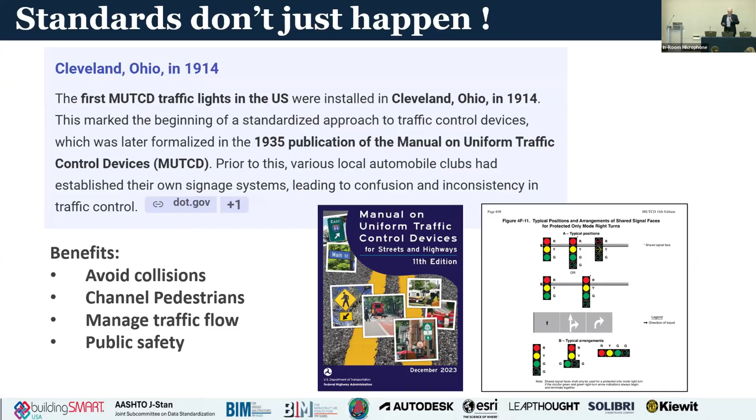Some of those advantages of standards are predictability of behavior, consistency, the ability to collaborate. We can share information that is meaningful both to the sender and the receiver. There's some reliability about the integrity of the data. So standards are often born of necessity, per the example we've just seen.

But as an industry, we're on a journey to really transform to digital project delivery, digital as-builts, asset management lifecycle systems that require data to be shared through the project lifecycle. So as we're on a journey for digital transformation, we've got to make the new standards that allow us to be efficient. We were all fine with 2D drafting standards. We were all happily drawing pen on paper, publishing sets of documents, being able to review them, redline them, wet signature. We had a set of standards for 2D drafting.

Then along came CAD, and we had to rethink and revisit what that new technology requires that we're not doing today, because our documents are now electronic files. They're PDFs. They're being shared digitally. They're being viewed on computer screens. All of that required CAD standards that didn't exist in the world of 2D drafting.

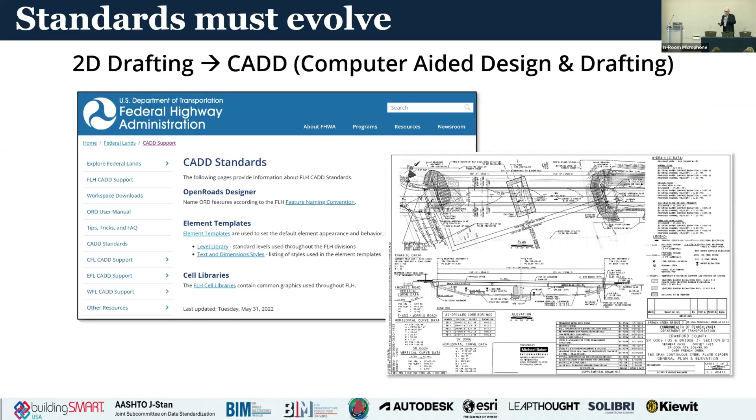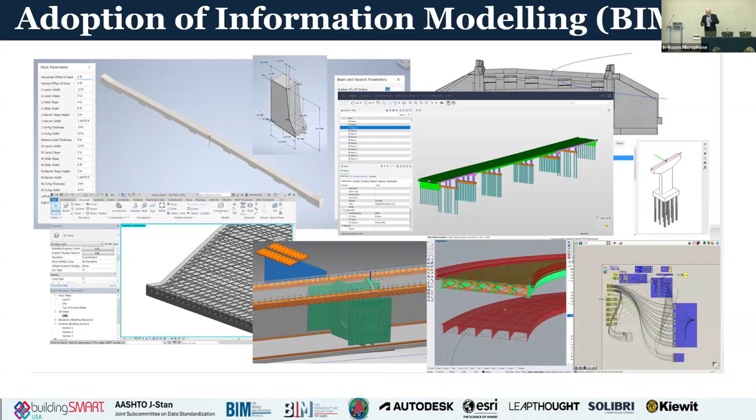Now, of course, we have a new challenge because AASHTO, with its resolution to adopt 3D modeling, raised the question: what's the standard for different ways of expressing geometry, how to associate properties and values to those objects and elements that are in the model in a way that they can be shared, with consistency and predictability, to facilitate collaboration. All of those benefits of standards are needed for 3D modeling and the adoption of BIM.

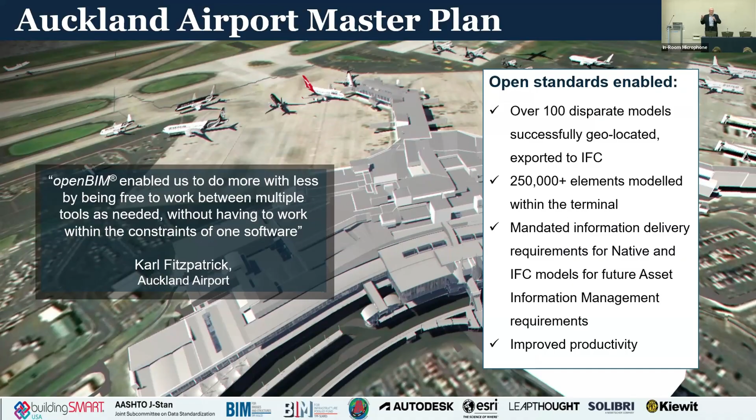And they chose a path of open standards. So this is a use case where open standards were able to solve a problem across, you can see there, 100 disparate models, 250,000 elements that were otherwise a lot of information about the project, but it wasn't structured information. It wasn't structured in a way that it could be used consistently, predictably, analyzed, and support asset management.

And as we look at each part of this, we can imagine the complexity, and again, standards come from necessity. Building Smart, as you've heard from Aidan, stepped up to try and solve the puzzle where leaders of industry came together and said, okay, we do need to have some kind of data structure that we can be better at managing all that complexity.

And that has subsequently become the IFC standard, but it really is just a bunch of agreements. Building Smart became the organization, consensus-based, where international industry leaders would come into the rooms, as Aidan described, which we now call domains, to make agreements on a common understanding for structured data. Initially, it was walls, doors and windows for buildings, and then it obviously expanded to the infrastructure elements, pavement, culverts, and so forth, alignments for infrastructure.

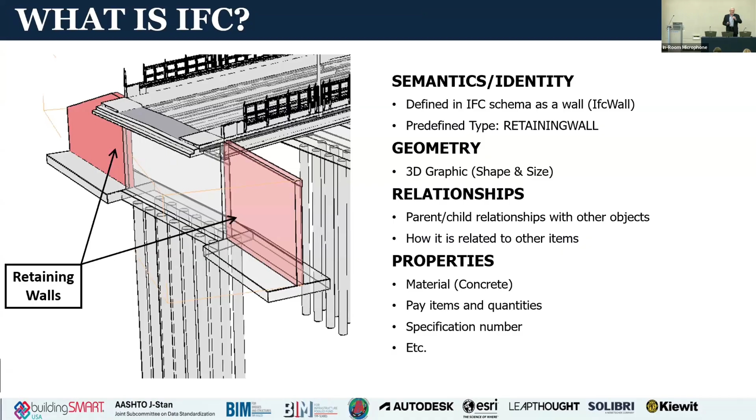IDM is this description of all of the steps of a work process. So AASHTO has actually published an IDM, BIM for Bridges and Structures Pooled Fund. When was that, Will? 2 years ago? Published an IDM where there are, remind me, 19 exchanges, that have been identified?

So far, we've covered one. So to the point that was made earlier, there's still a lot of work to do, but we're on the right path. And having done one, we've now got a lot of lessons learned on how we can be more efficient and productive to tackle others.

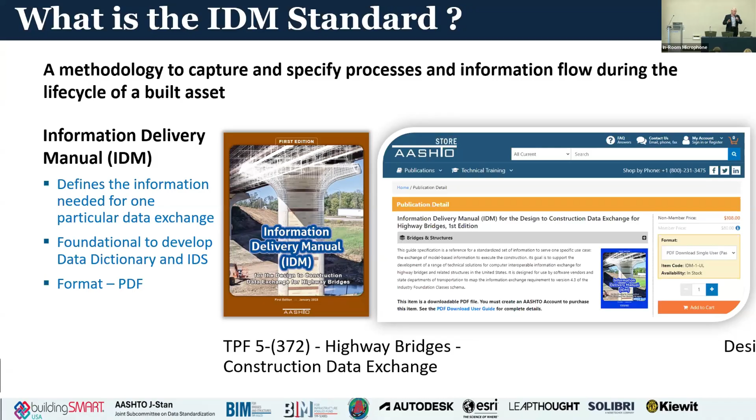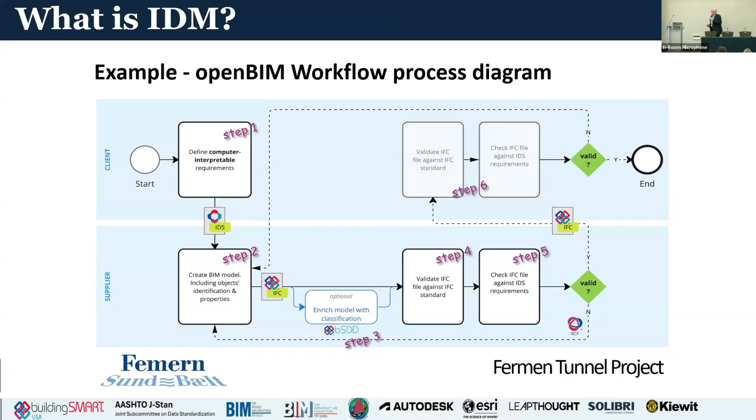And it's about identifying workflows. This is not the BIM for Bridges example. This happens to be an example from the project that Aidan referenced, the Femern Tunnel between Denmark and Germany. So the point being, all of this scales. It scales to one of the largest projects in Europe. It's not just about a small local project in a county.

The use case management service is an online service. So if you have that problem you're trying to solve, you could write it up in an IDM, or now what you can do rather than write it up as an IDM is you can go to the use case management service. You may find a template. You may find a library of existing use cases that you can leverage, because trust me, a lot of the problems we're trying to solve are the same problems that are being solved by all of these other road authorities in other countries. So this is an environment where we can share use cases, we can look at other people's work process, we can learn from them, we can adapt or modify, and use this as a library or use this as a creation tool.

This is about documenting the use case and all of the information needs that you have around how you support that work process.

We've talked to you about the Building Smart Data Dictionary. I call this the 80-20 rule. If you want to simply understand the dictionary, 80% of what you need is already in the commonly defined IFC standard internationally. But there's the other 20% that might be variable. It could be variable on a national basis. You may have a national standard where you want to extend the international standard to include national requirements.

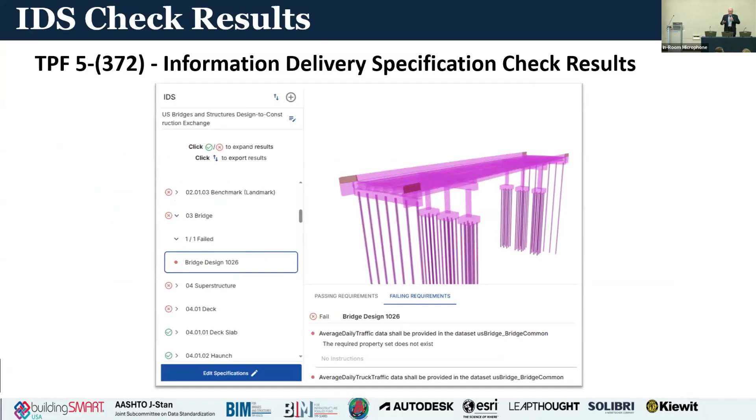And IDS can be checked to be sure it's complete—is it all there? Automated checking, again very efficient, really leveraging technology in a way we haven't been able to do before.

Validation service—this is a free online service, and Aidan talked us through this in detail—you are validating that you are following all of the rules in the standard, validating the integrity of the data structures in your bridge model or road model against the standard.

And we're back to red and green, which is where we started. Red means it's got an error, and you can drill down, as Aidan showed us, to get a description of what that error is and what needs to be fixed in the model. Green means you got it right. Gray means it's either not in the model or not in the software you're using, so that's really a null result.

But this idea that we can now look at data all over the world really gives us information we can use to put onto the scorecard that Aidan described. That's the scorecard that allows us to certify software, to say in all of these green areas, all these functional parts, this software is working 99.7% of the time.

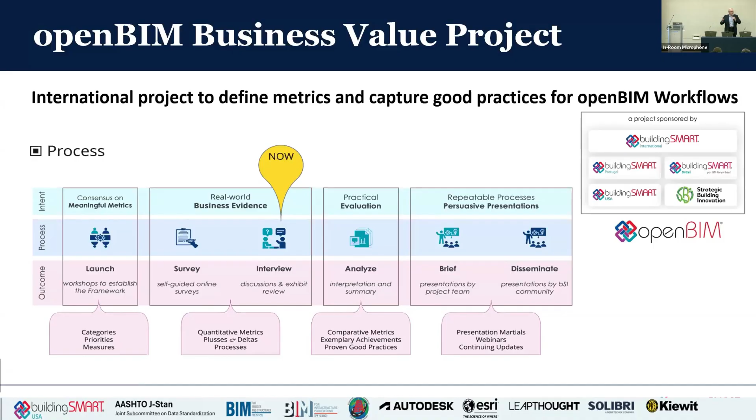So, really fast, we want to be able to quantify this. Calvin talked you through this project—it's about quantification. How do you make the business case to your leadership? Which is exactly what Will said—we all have to advocate to leadership to make this investment. So the project Calvin's leading is all about quantifying ROI so you can make that business case.

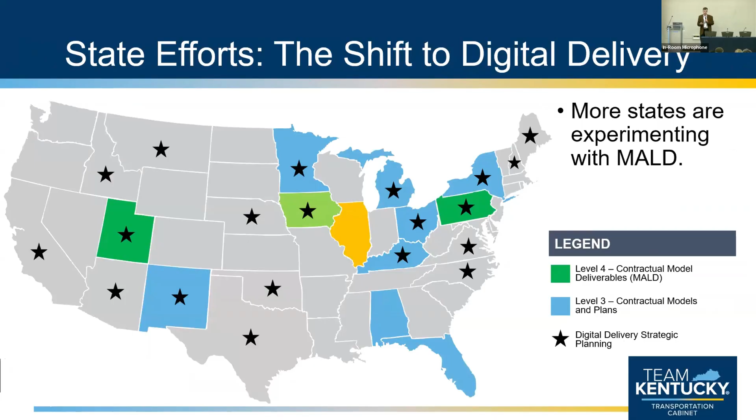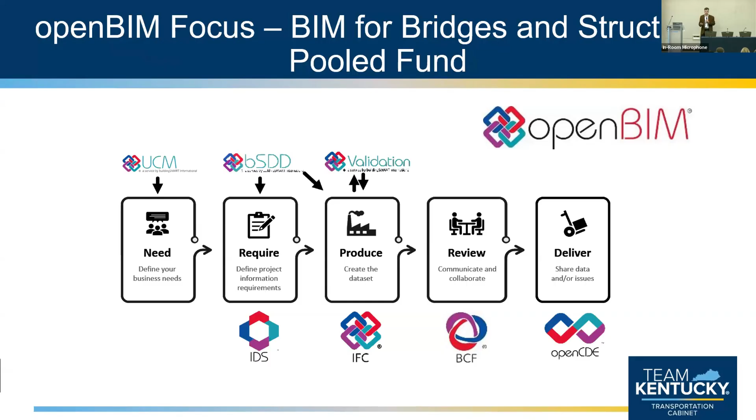So again, some are doing model as legal document. And this is out of date apparently. So Ian, I'm going to have to borrow from you. But again, there is this, and we have opportunities to leverage what other people have done hard work to create. So again, let's do that. Let's not pretend that we're going to start from scratch and figure this thing out.

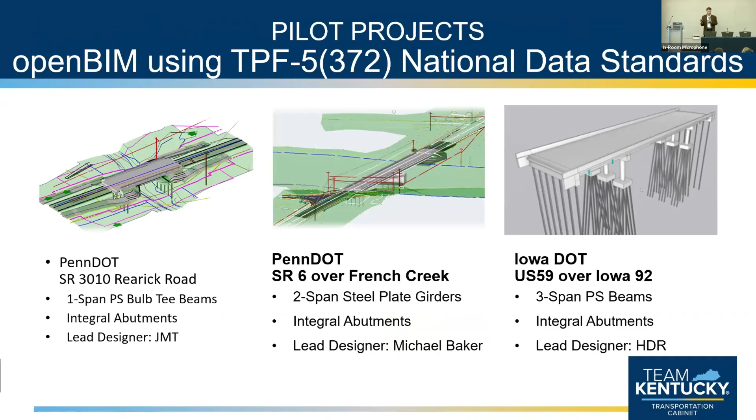So here are some examples of how we've used openBIM in the United States. First of all, I think all three of these were presented at IHEEP a few weeks ago, where we have three different bridge efforts, three different engineering leads, and building those out.

So again, we start with the engineer that's doing the design work. No longer should the DOT say you have to use this piece of software. We need to break free of that locked-in model. Number one, we're not necessarily getting the best because we've been using this software for 20 years, so we have to use it for another 20. No, we need to be open to what is the best software to solve this problem. So pick the software of your choice that fits the need.

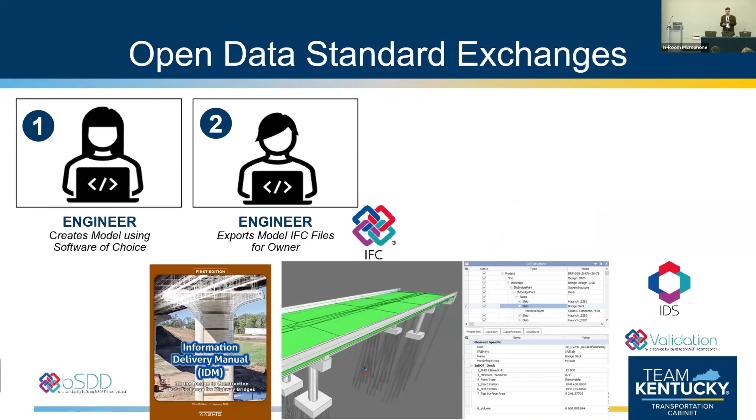That data is exported out, given to the owner. The owner then advertises that, right? The contractor takes that data in through an open file. Again, they get to choose the software of their choice, or actually softwares that serve the needs, the purposes that they need, the problems they need to solve. It's at their discretion.

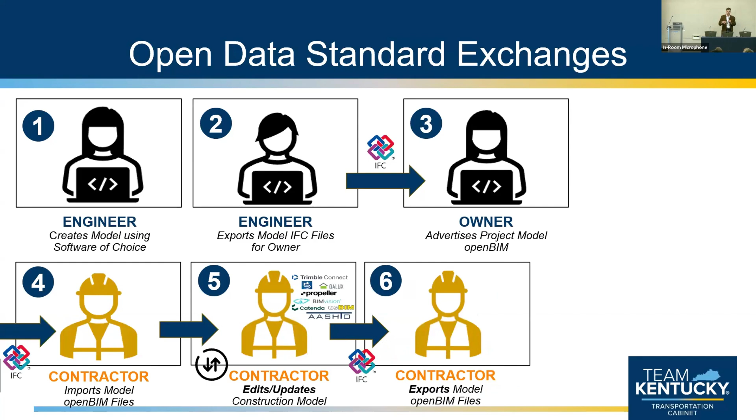Ultimately, when they finish and the inspections are complete, that final model or models would push back to the owner, which I really need another slide, that would then diffuse that throughout the data ecosystem that is our assets. Your guardrail is going to go in a separate place from your lights, which will go in a separate place from your pavement, which is a separate place from your bridge. The world doesn't end. Those assets need to continue to live, and we need to honor the information all the way through, including financial, through the life of that asset.

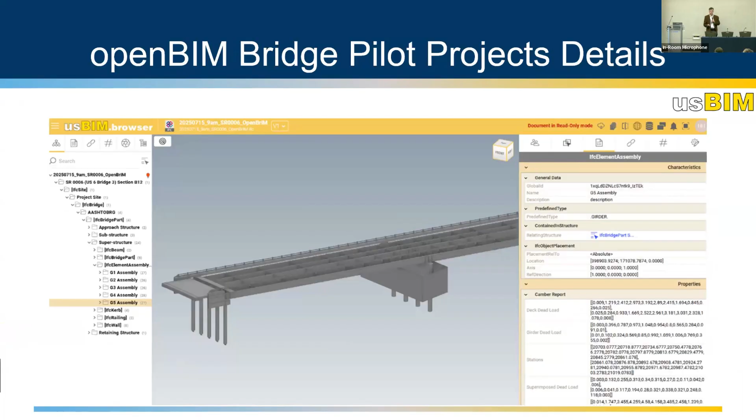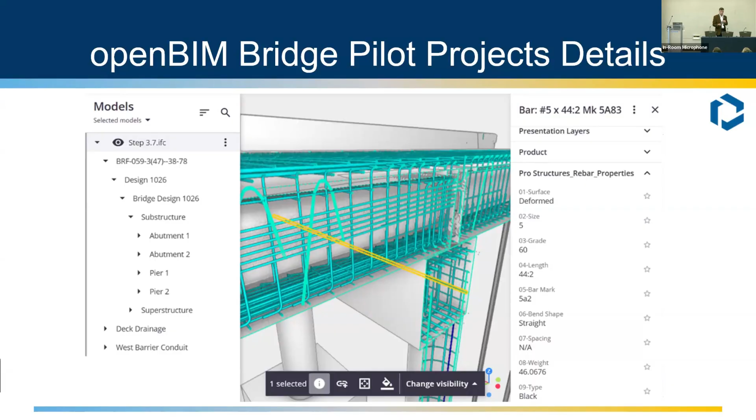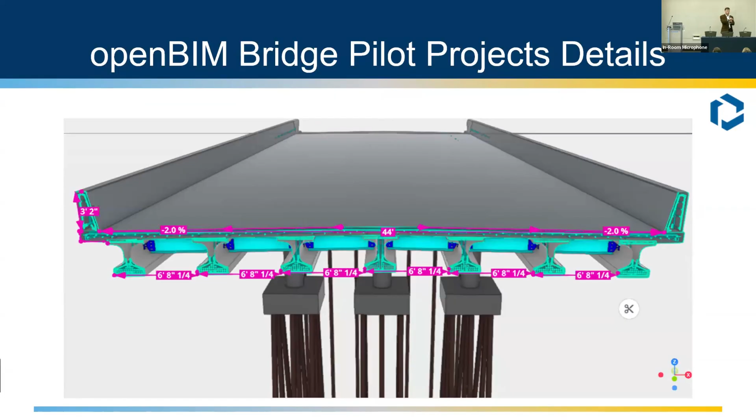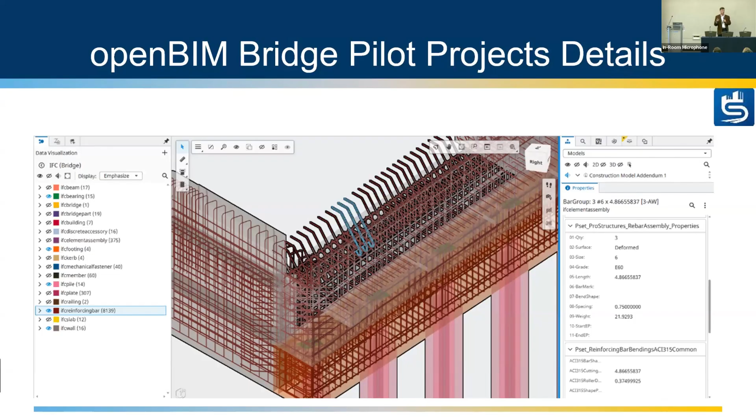This is using, it's Trimble—Trimble Connect, thank you, Will. And now again, within that BIM model, you're seeing the detail that's actually designed out, all the rebar. And again, just dynamic use to where you can see auto labeling, et cetera. All of this stuff should just naturally be flowing through the different parts of the work process. Different perspectives, different software, same data. That's the critical thing—you don't have to use one and only one piece of software.

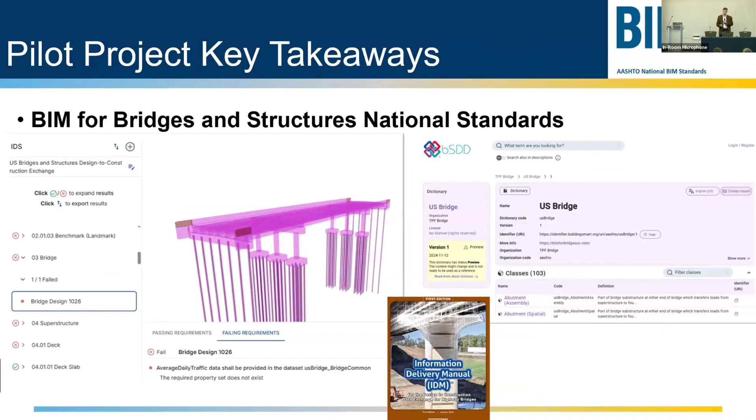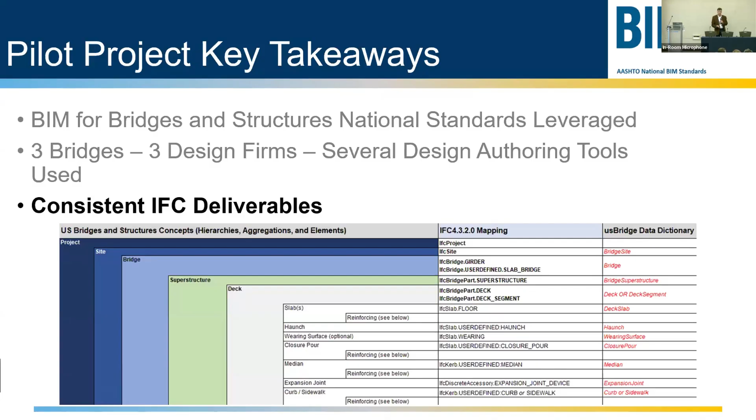So some key takeaways. We use the national standards to drive these efforts in the pooled fund, or in the states that were part of the pooled fund. We used three different design firms, a lot of different authoring pieces of software, but we got consistent IFC deliverables. While we're different states, we're still able to drive into an open standard. And we had the flexibility in construction to use the tool that fit that moment and need.

So that information is feeding back again into AASHTO, into our openBIM community to try to drive change and innovation.

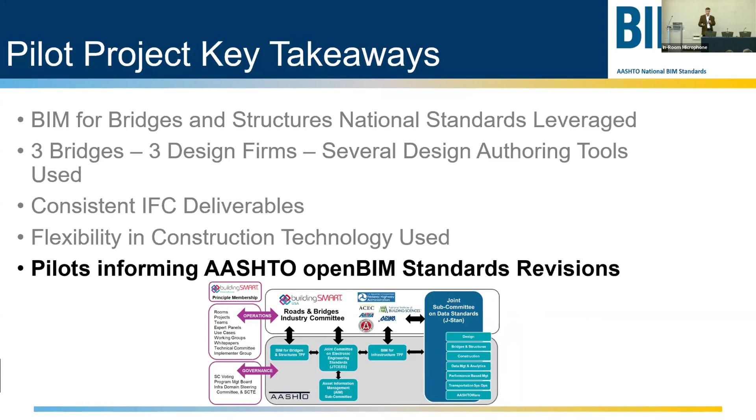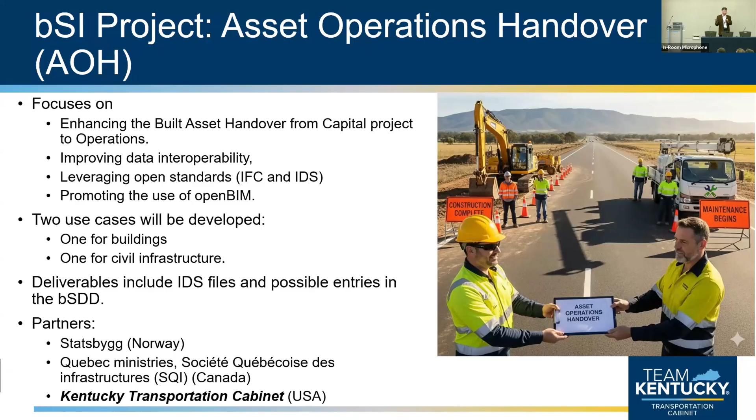Final thing, I've mentioned it before, I'll mention it again. We're doing the asset operation handover to define the use cases, to understand what it is we need to build into the standard to efficiently hand off from the construction world into the asset management world. And just to plug AI, that's an AI generated image. So we are using it. We need to know it's coming. We need to understand it and then be honest about it when we use it. Okay, so that's it. Short and sweet.

And Will, if you'll stand up. Will actually co-authored this. I was just in a hurry and I forgot to say that, but thank you, Will.

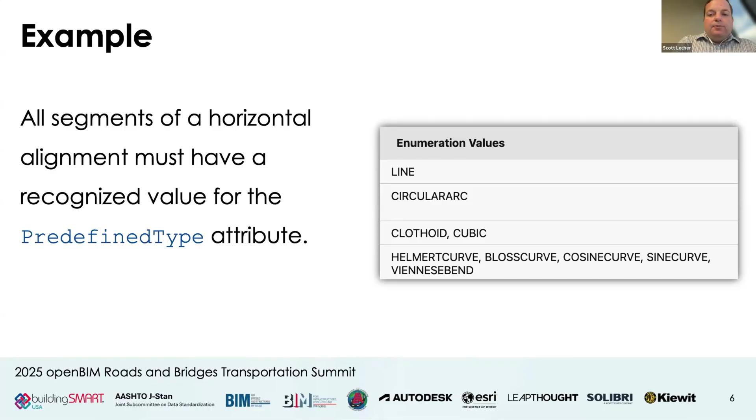And we would expect the majority of usage here in the United States to be horizontal segments that are either lines or circular arcs, then of course with the occasional clothoid spiral.

Sounds like we've already touched on the validation service multiple times, so I won't take too much time revisiting that again, other than to re-impress upon folks that this is a fantastic tool for doing this foundational model validation.

Okay, so now if we move on to the next step, get into model verification. So let's extend our analogy of a homework assignment. And so now this is when the teacher is checking what you submitted against what they asked for. You can think of this as the requirements of the rubric.

Or in terms of model verification, this could be seen as a set of rules. They're going to be graded on a pass-fail basis. So again, going back to alignment geometry, if we're going to be grading an assignment, we need a list of rules or things that the assignment needs to address. So here's something that could be part of this step of the model checking process.

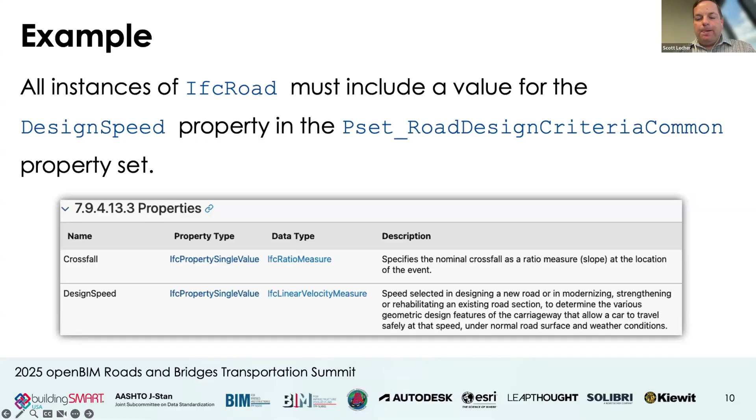So the good news is, of course, that this is the sort of thing that lends itself very well to capturing as part of an IDS specification, and then using one of those multiple hundreds of tools to check in an automated manner at scale. So that's good for this example.

Of course, we have other examples that aren't quite as straightforward. So if there are any other road designers in the audience, you may recognize this directly from the AASHTO Green Book. If we have a road that has a design speed of 35 miles an hour, and it has a horizontal alignment segment that is a circular arc and the radius is 1,820 feet, then the superelevation rate needs to be at least 3.2%. So as I said, we're getting kind of complicated here, and this is going to require a different type of tool.

Usually I see this in an Excel spreadsheet or series of Excel spreadsheets with a bunch of multi-arm V lookups going in a bunch of different directions. Or it may also just be a manual check.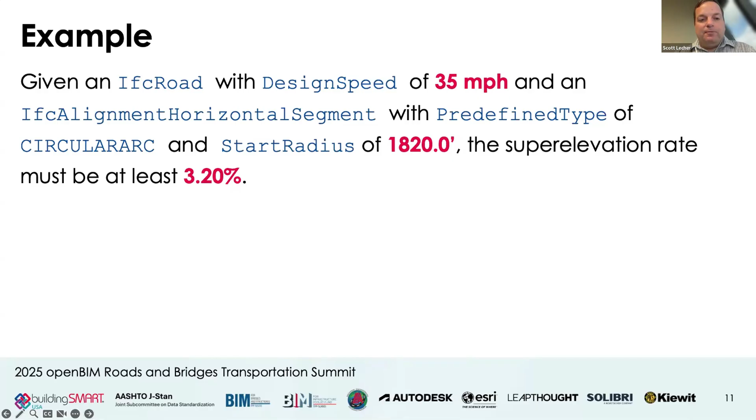All right, so then part 3, model certification. This is where the writing assignment analogy starts to fall apart a bit. But the best I could come up with is this is when the teacher checks that you didn't cheat by claiming someone else's work as your own. And I'll steer entirely away from AI and large language models and any sort of what's currently going on.

So in terms of model certification, we've got to first identify what needs to be certified. And this could be multiple things, right? It could be the content of the model itself. It could be that we want to certify that something was actually prepared by a registered professional, sort of a license number and the corresponding state board that that person is registered with.

We also have certification for the software tools, along with other certifications that I didn't list here, like professional certifications and training and so on. So it feels like there's a lot here and this might be overwhelming, but I would say fear not. By and large, these are already solved problems.

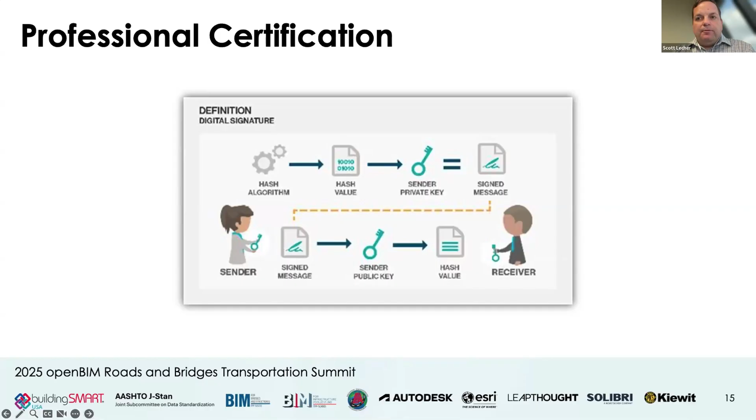Okay, coming into the home stretch, software certification. So here I wanted to again draw an example to something that already exists, something that we already have. This is more from the construction side. One of the ways you could think about this is to think of software tools and software vendors or technology suppliers as suppliers. And like I said, we already have this in construction, suppliers of our materials, things like aggregates.

So let's say you're a general contractor in Indiana and you just won a nice construction project and you need some stone for subgrade treatment. You probably have a good idea of what quarry you'd like to haul that stone out of. So all you have to do is go online, look up this list, and make sure that your quarry is on the list here.

Pretty straightforward, right? So let's then say you're a designer and you know what software tool you'd like to use for authoring the models as well. You can just go online, look up your software tool, and make sure it doesn't have any of the red failing marks on the scorecard from any of the rules that were checked and didn't check out.

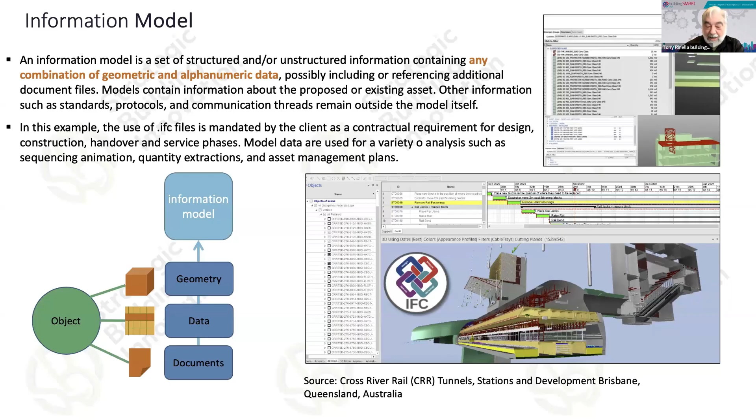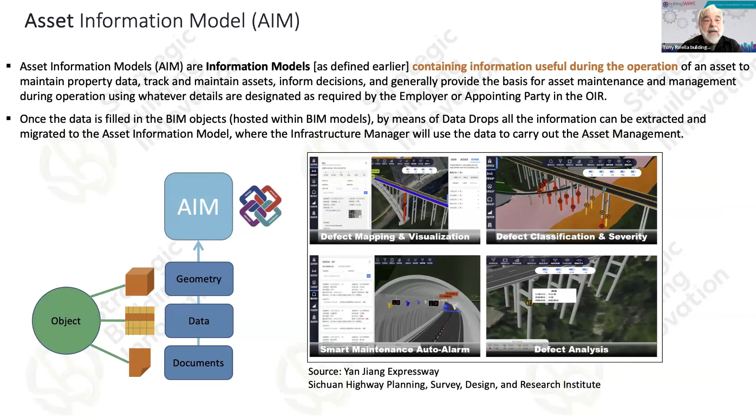And for those who are thinking, yeah, but what are you doing about infrastructure - the training providers here in the US understand that infrastructure is hugely important. So the curriculum, the training material provided - this is an example slide from a foundation course - you'll notice somebody understands that transportation exists. And when we talk about the importance of an asset information model to help manage the built environment, we do understand and have practical examples for how transportation needs to use this technology and can benefit from it.

So here comes the pitch, my friends. We are now entertaining openBIM for infrastructure. It is an international program that was developed in the European chapters, is being translated into English, and will soon be available for us to review and modify.

There's a new process happening at buildingSMART at the international level that acknowledges communities of practice are different from chapter to chapter, and they are giving us the grace of not having to create a new course all on our own, but being able to take this material that was developed through international collaboration and make it our own for the US.